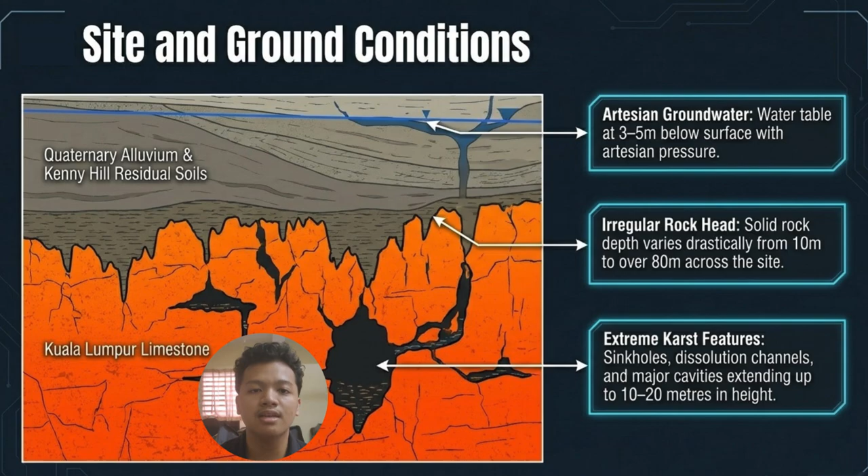One of the biggest challenges at Merdeka 118 was the ground condition. The upper layer consists of quaternary alluvium and Kenny Hill residual soils, while beneath it lies the Kuala Lumpur limestone formation. This limestone is highly irregular due to karst formations which contain underground cavities, voids and solution channels. In addition, the rockhead depth varies significantly, ranging from about 10 meters to more than 80 meters. Groundwater was also encountered at 3 to 5 meters below ground level. This challenging geological condition required detailed site investigation to construct safely.

Next is design consideration. Before construction began, engineers studied the site condition and structural requirements. Since Merdeka 118 is 678 meters tall, the foundation had to support a massive structural load of around 300,000 kilonewtons. One of the biggest challenges was the karst limestone beneath the site, which contains underground cavities and weak zones. To overcome this, engineers carried out 100% pre-grouting by injecting cement grout into the ground before piling works began.

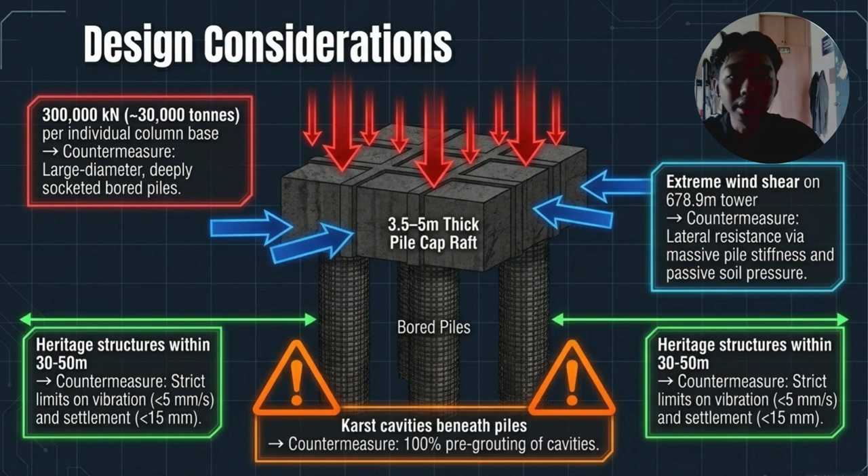Another important consideration was the nearby heritage building, located only 30 to 50 meters away. Therefore, vibration and ground settlement were closely monitored throughout the construction to prevent any damages.

Next is construction method. The foundation construction was carried out in 3 stages. First, engineers improved the ground by drilling investigation holes and injecting grout into limestone cavities to strengthen the soil. Next, bore piles were drilled deep into the limestone bedrock using large rotary drilling rigs. These piles were socketed into the rock to provide strong support for the building.

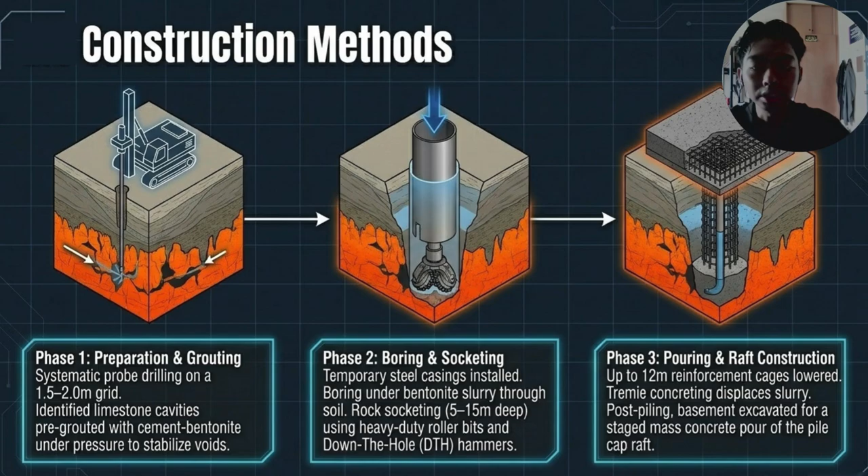Finally, reinforcement cages were installed. Concrete was poured using the tremie method, and a large reinforced concrete raft was constructed to connect all piles into a strong foundation system. Next is material use.

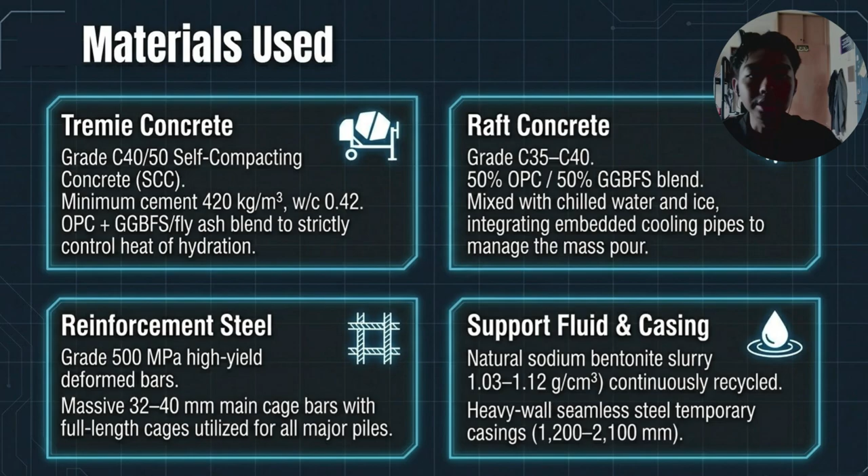High quality materials were used to ensure the strength and durability of the foundation. The bore piles were constructed using grade C40-50 self-compacting tremie concrete which flows easily into deep piles and provides high strength. The ground foundation used grade C35 to C40 concrete mixed with 50% ground granulated blast furnace slag, or GGBFS, to reduce heat during concrete curing and minimize cracking. In addition, grade 500 reinforcement steel, bentonite slurry and steel casing were used to strengthen the foundation and stabilize the borehole during digging.

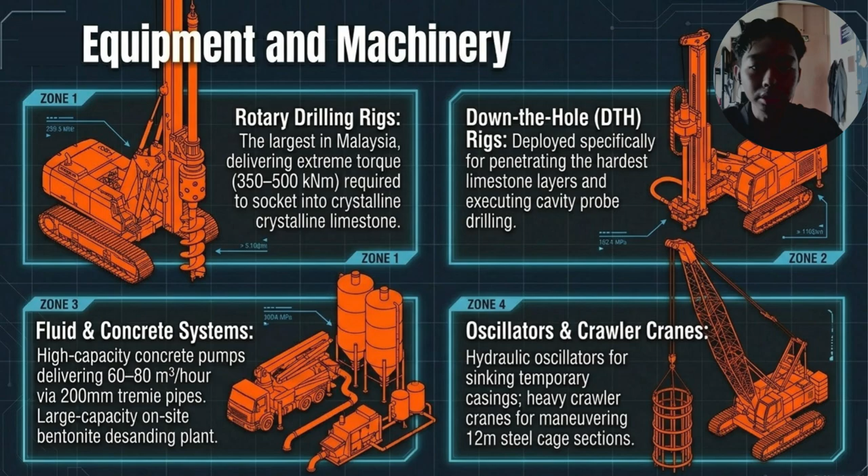Next is equipment and machinery. Several advanced machines were used during the construction. Large rotary drilling rigs drilled the bore piles deep into limestone, while down-the-hole drilling rigs created strong rock sockets. Crawler cranes lifted the reinforcement cages and steel casings into place. High capacity concrete pumps delivered concrete continuously during the pile construction. A bentonite recycling system was also used to clean and reuse the drilling slurry, improving efficiency and reducing waste.

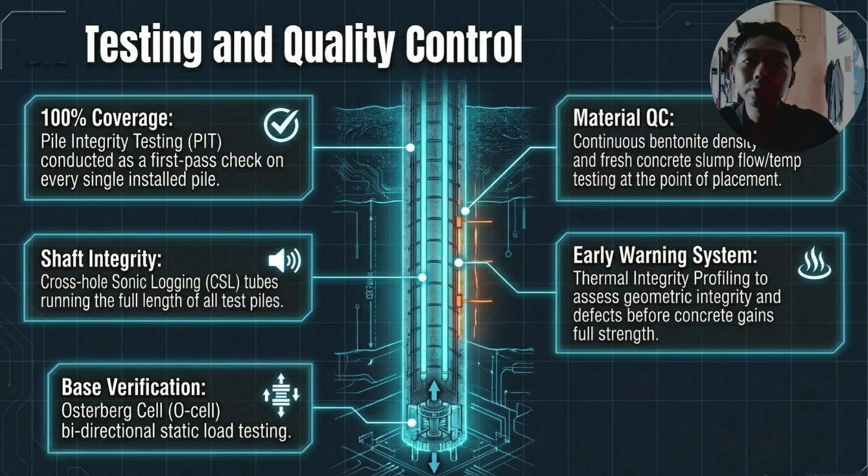Next is testing and quality control. Strict quality control was carried out throughout the project. Each pile underwent pile integrity testing to detect cracks or defects, while cross-hole sonic logging checked the quality of the concrete. The engineers also performed Osterberg cell load tests to confirm that the piles could safely support the building design load. In addition, the quality of grout, slurry, concrete temperature, and ground movement were continuously monitored to ensure the foundation met all safety and performance requirements.

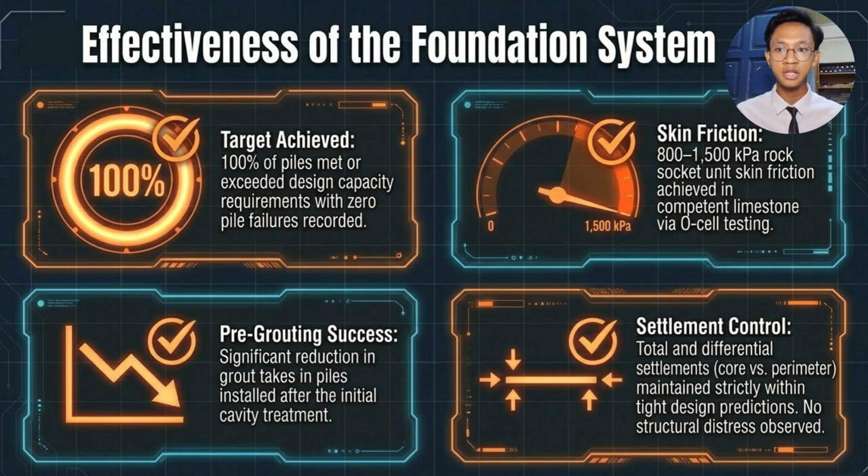Next, building on this kind of unpredictable cave-fill ground is not cheap. The total foundation cost came to between 315 and 415 million ringgit, which is about 8 to 12% of the entire project budget. This includes the cost of drilling deep into the ground and building a massive reinforced concrete base. While these numbers are high, they were completely necessary.

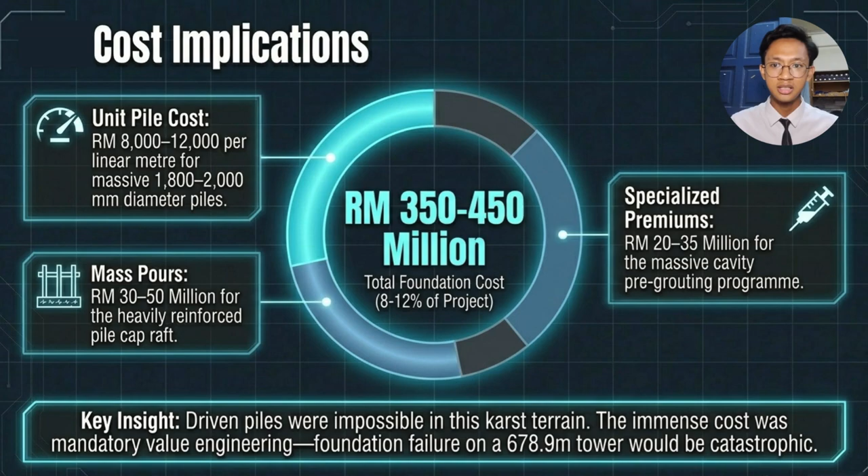Next, of course, a project this big comes with great challenges. We ran into three main issues. First, hard rock was bending our drill bits. We fixed this by switching to specialized rock cutting bits and pre-drilling smaller pilot holes.

Second, the heavy concrete was pushing the steel cage upwards. We solved this by using a heavy physical frame to hold the steel down and monitoring it in real time.

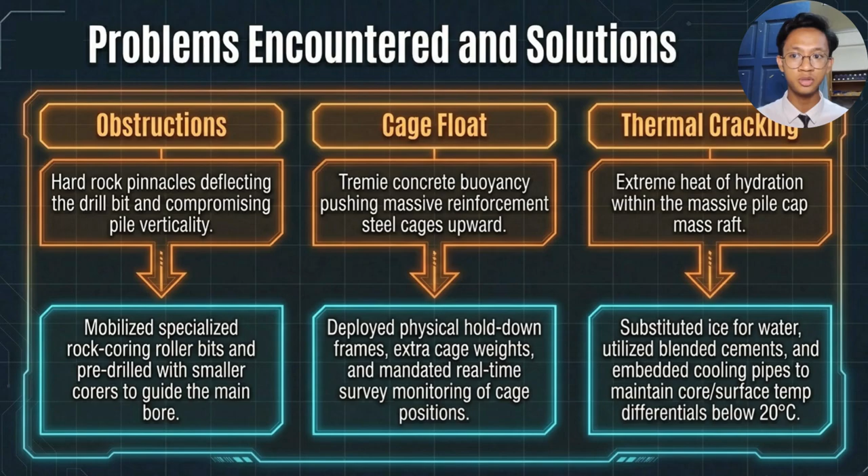Third, we had to stop the massive concrete base from cracking due to heat. We used ice instead of water in the concrete mix, and ran cooling pipes through it to keep the temperature down.

Looking ahead, we recommend three smart upgrades for future projects. First, automated drilling: use smart drills that track speed and pressure in real time to instantly spot underground caves. Second, 3D ground modeling: updates our digital maps live as we drill, so we know exactly where to pump the concrete.

Third, live tracking: use automated sensors to monitor ground movement in real time. This lets the team instantly react and protect nearby historic buildings.

Okay, thank you, Fawaz. Now I will explain about precision under pressure. The BBCC project was built in a very busy urban area with limited working space and complex ground conditions. Therefore, engineers needed to work with high precision and careful planning to ensure safety and accuracy. Advanced technology, continuous monitoring, and experienced workers were important to avoid damage to nearby buildings and infrastructure.

Next is an 8.7 billion ringgit urban behemoth. The BBCC project is a joint development project. It was built on the former Pudu Prison site. The project includes residential towers, commercial buildings, and public transport connections.

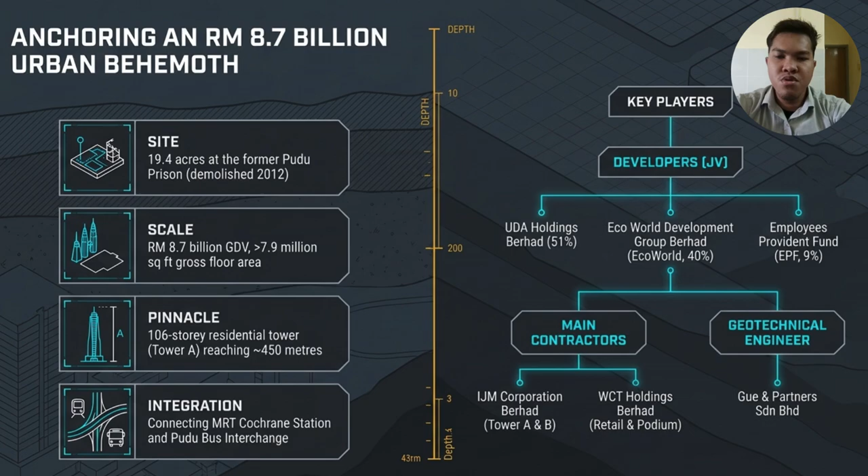Many parties were involved in this project, such as developers, contractors, and engineers. They worked together to choose the best foundation system for the project.

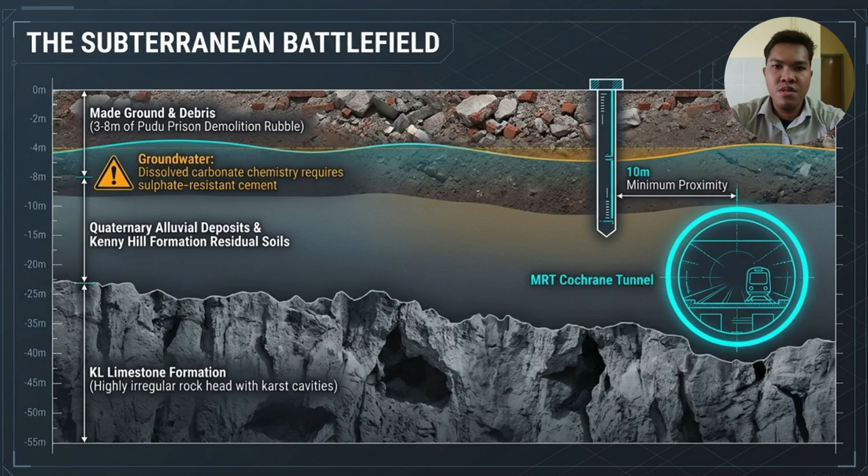Next is engineering for extremes, which is load versus proximity. The engineers had to deal with two main challenges. First, the buildings have very heavy load, so the foundation must be very strong.

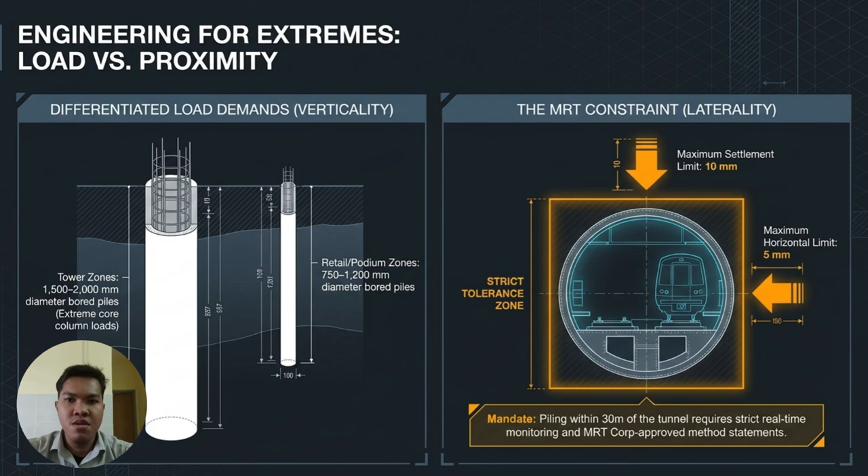Second, the construction site is very close to existing structures and MRT tunnels. Therefore, the construction work had to be done carefully to avoid damage. Proper planning and engineering solutions were very important in this project.

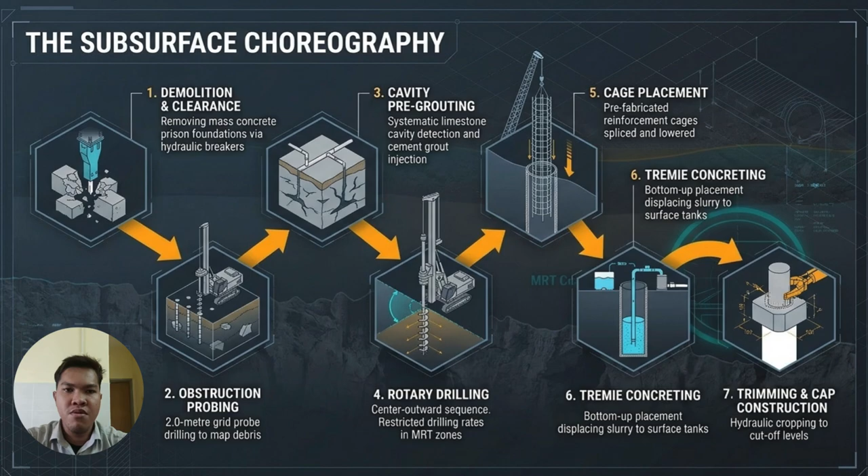Next is the subsurface choreography. The construction of the deep foundation involves several steps. First, the engineers carry out site investigation and soil testing. Next, they start the drilling work and install the reinforcement cage. After that, the concrete was poured into the foundation. Finally, quality inspection and monitoring were carried out to ensure the foundation was safe and strong.

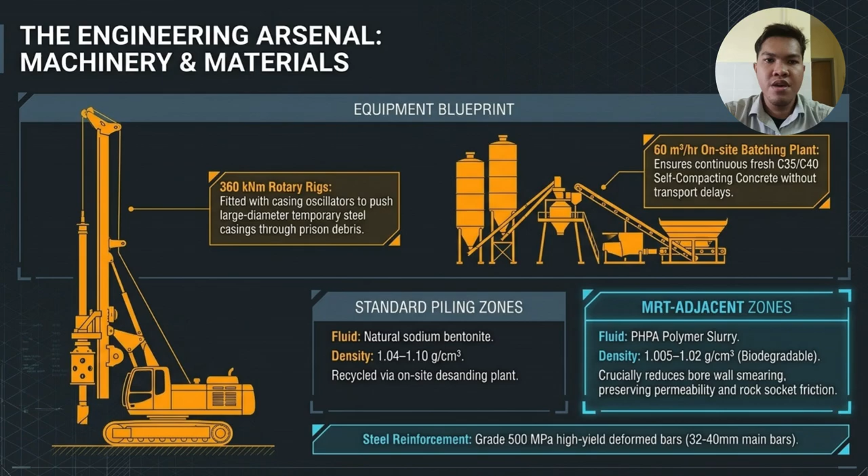Next is the engineering arsenal, which is machinery and materials. In this project, many types of machinery and materials were used. The main equipment include drilling machines, cranes, and monitoring instruments. High-strength concrete and steel reinforcement were also used to increase the strength and durability of the foundation. The use of modern technology and quality materials helped ensure the success of the BBCC project.

Thank you, Haziq Zafran. Now I would like to present on quality control, testing, and monitoring methods used to ensure the safety and reliability of the piling works. Firstly, static load capacity testing is carried out on selected preliminary piles to verify that the piles can safely support the design loads and to determine the appropriate pile capacity based on the ground condition.

Next, dynamic integrity testing is conducted after pile installation. High-strain dynamic tests are performed on selected production piles, while low-strain integrity tests are carried out on all installed piles to detect any defect or damage.

To ensure concrete quality, strict material quality control is implemented. Fresh concrete is checked through slump flow and temperature tests, while cube strength tests are conducted to confirm that the concrete meets the required design and strength.

Finally, real-time telemetry monitoring is used, especially in areas near the MRT. Automated monitoring stations continuously measure ground and structure movement and send data to the project team at regular intervals. This allows any unusual movement to be detected early and helps maintain construction safety.

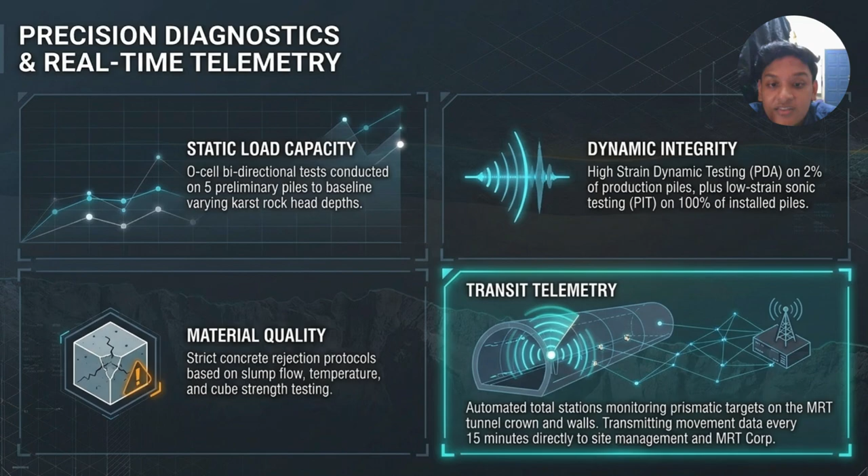Overall, this testing and monitoring system ensures that the piling works meet quality standards while protecting nearby structures throughout the construction process.

Now, I would like to explain the effectiveness of the piling and monitoring system throughout the projects. The slide indicates that the construction activity did not cause excessive ground movement or affect nearby structures. As shown in the outcome summary, the MRT infrastructure was fully protected throughout the piling works, with all movement remaining below the alert threshold. The result also confirmed that the conservative construction approach, including the use of polymer slurry and more controlled drilling methods in MRT sensitive areas, was effective in minimizing risk.

In addition, the rock socket performance consistently met the required design standard despite the varying limestone condition at the site. Overall, this result demonstrates that the selected construction method, quality control measure, and real-time monitoring system successfully ensure safe, stable, and high-quality piling works while protecting the surrounding environment and infrastructure.

Now, for this slide, I will explain the cost of implementing the foundation protection measure for this project. The total foundation works are estimated at around 160 million to 200 million ringgit, which accounts for approximately 9 to 11% of the total project cost.

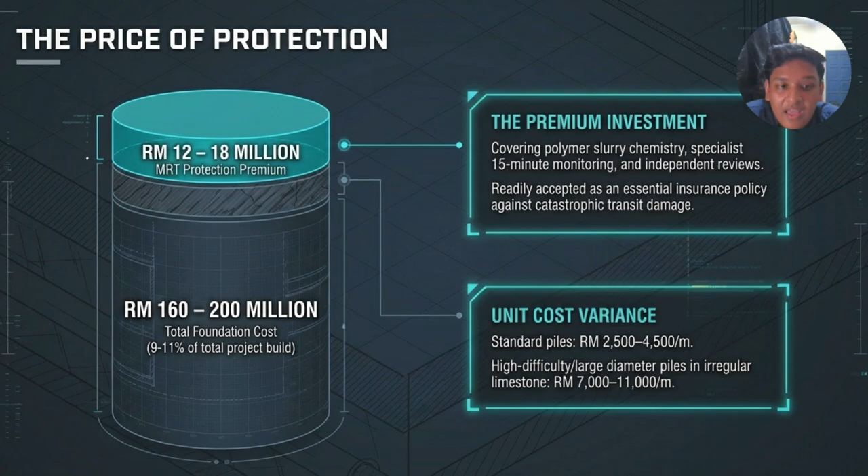The cost of constructing piles also varies depending on the site condition. Under normal condition, piling costs range from about 2,500 to 4,500 ringgit per meter. However, in more challenging limestone ground or where large diameter piles are required, the cost increases to between 7,000 and 11,000 ringgit per meter. Overall, this protection measure increases the project cost. They are valuable investments because they improve safety, reduce construction risk, and protect the nearby MRT infrastructure.

Now, I'm going to talk about some of the challenges encountered during the piling works and the action taken to overcome them. During construction, several technical issues can occur due to ground condition and the complexity of the project. To manage this challenge, the project team closely monitored the construction process and engineering solutions.

Whenever a problem was detected, work was reviewed immediately. Corrective action was implemented and construction continued only after safety was confirmed. This approach helped reduce risk, maintain construction quality, and protect nearby structures. Overall, effective problem solving, continuous monitoring, and quick decision making were essential in ensuring that the piling works were completed safely, efficiently, and according to the required standards.

Now, I would like to present 4 ways to future-proof underground construction by improving safety, efficiency, and long-term performance. First of all, pre-demolition ground penetrating radar, which is GPR. GPR is used before excavation to detect underground utilities and hidden obstacles. This helps prevent damage, improve safety, and reduce construction delays.

Secondly, mandated casing isolation, where temporary steel casing is used to support the borehole during construction. After the work is complete, the casing is removed and replaced with recycled polymer slurry to protect the surrounding soil. Thirdly, foundation digital twin. A digital twin is a virtual model that monitors the foundation in real time. It helps engineers detect problems early and plan maintenance more effectively.

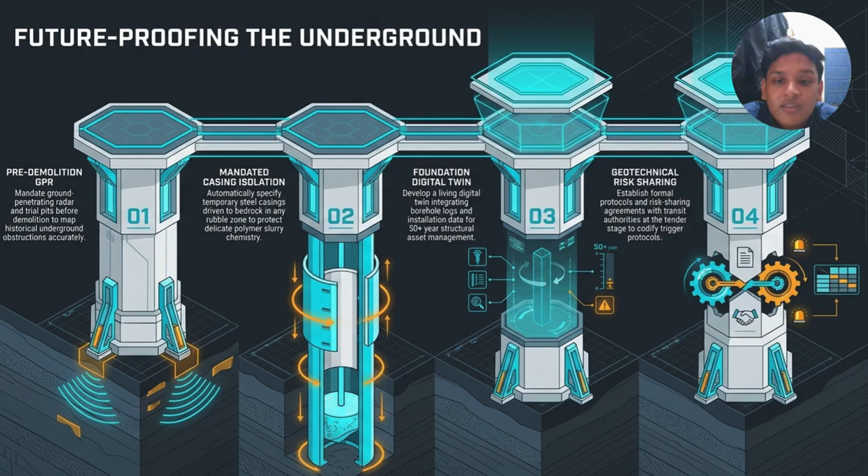Finally, geotechnical risk sharing. This involves clear agreements between all parties on how to manage unexpected ground conditions. It reduces disputes and helps the project run more smoothly. In summary, these 4 strategies make underground construction safer, more efficient, and more sustainable while improving the long-term performance of the project. Now, I would like to invite Muhammad Taufik Hidayat, who will be the next presenter.

Now, I will move on to the comparison between Merdeka 118 and Bukit Bintang City Centre. Merdeka 118 is a single super tall tower, so it requires much larger bore piles, approximately 750 piles, reaching 80 meters with diameters of 2000 mm.

In contrast, BBCC is a mixed-use development consisting of several towers and hotels. Therefore, it uses around 2,100 bore piles with varying diameter, depth up to 65 meters.

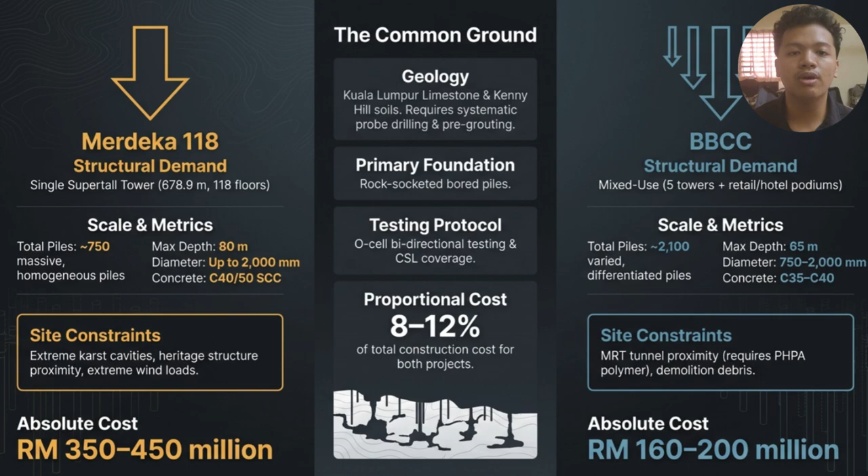For Merdeka 118, the main challenge was the presence of extreme karst cavities and nearby heritage buildings. Meanwhile, BBCC had to protect the adjacent MRT tunnel, which required continuous settlement monitoring throughout construction. Although the total foundation costs were different, both projects allocated around 8 to 12% of the total construction cost to foundation works.

Overall, both projects achieved excellent foundation performance. Neither project experienced structural pile failure or post-construction foundation distress, showing that the selected foundation systems were highly effective.

For Merdeka 118, the high construction cost was necessary to support the enormous structural load of a super tall building built on challenging karst limestone. For BBCC, the use of different pile sizes and careful monitoring of the MRT tunnel provided an efficient balance between safety and cost. This case study demonstrates that selecting the appropriate deep foundation system, together with proper investigation, testing, and quality control, is essential for ensuring safe and successful construction on Kuala Lumpur limestone geology.